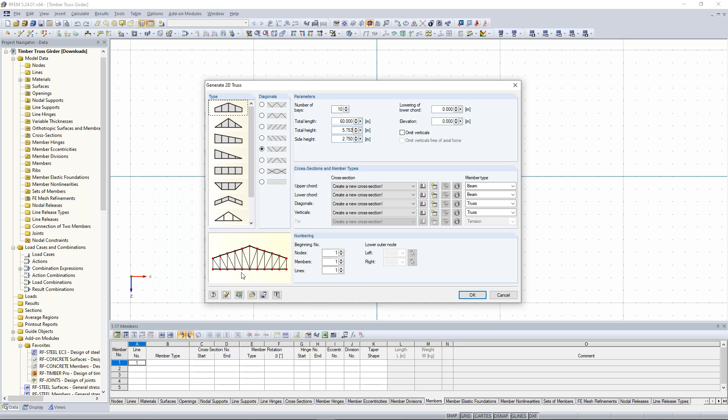At first we want to create this girder, this truss structure. For that we go to the menu bar and click on Tools, then Generate Models by Members, and here we can choose 2D Truss. I decide on this type of diagonals because I want to transfer tension loads, tension forces, in the diagonals, so I choose this type of 2D truss. My number of bays is 10, and the total length of this girder is 60 meters. The total height at the point here in the middle is 5.753 meters, and the side height, on the left or right side, is 2.75 meters.

Now I have to create new cross sections with the right material, for the upper chord, the lower chord, diagonals and verticals. For the upper chord, I don't know the right pronunciation, sorry for that, I choose a new cross section. I think the right word is chord. Yeah, I guess so, it's chord. Okay, thank you.

Thank you, Ayla. So I create a new chord and choose a rectangular chord because we want to create a timber chord. I click on that icon, and my parameters for the width and height are: width 220 millimeters, and height 560 millimeters, so 56 centimeters and 22 centimeters.

Now important is that we choose the right material. Here you see I just have concrete and steel, but we want to have a glue-lam timber. So we have to create a new material, and here we create this new material when we click on this material library. I choose timber, and this mask jumps to the normal timber materials.

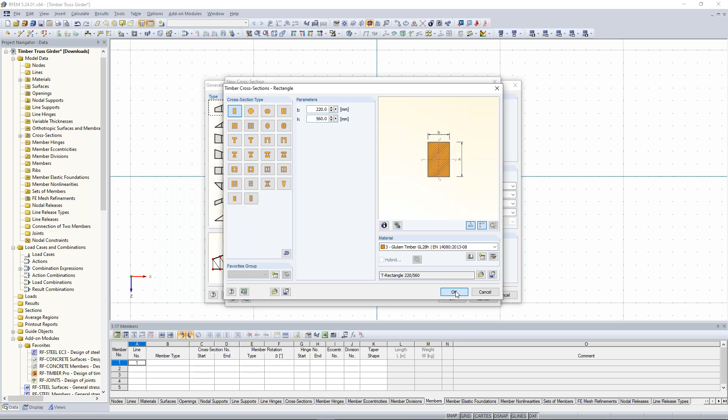Now I can copy this cross-section description with the Control key pressed, plus C key. Click OK, and create a new cross section for the diagonals. Now I copy this, choose the right material, and change the cross section to 200 and 200, so we have a quadratic cross section here. Click OK.

Now the same thing for the verticals. Here we have a cross section of 200 and 180, also material glue-laminated timber.

So now on the right side you see the different member types, beam and truss. Where is the difference? Beam can transfer all typical internal forces like bending moment, normal and shear forces, while truss is a member type that has hinges at the ends, and therefore can transfer only normal and shear forces, no bending moments. Keep that in mind.

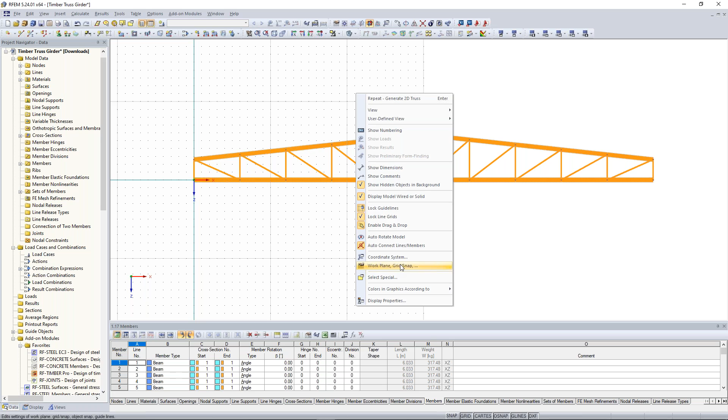The next step is that I want to adapt my grid to the size of our model. For that I right-click and choose work plane grid snap, and here I have the possibility to adapt my grid according to the size of the model. When I click on that, you will see the whole grid system adapt to the whole size of my model, and this makes the overview of the whole model and project a lot easier.

The next step is that we delete the left members and the right members, because I want to create here a support, a single support. So I draw a selection window from the right to the left side, and the same on the right side. Then I can right-click and say delete. Now these members were deleted.

Now a very important point, because I want to transfer some forces here, we change these diagonals to the member type beam. I select this diagonal, press the Control key to add additional members to the selection, press this diagonal, then double-click with the left mouse button, and now I change the member type to beam. Click OK.

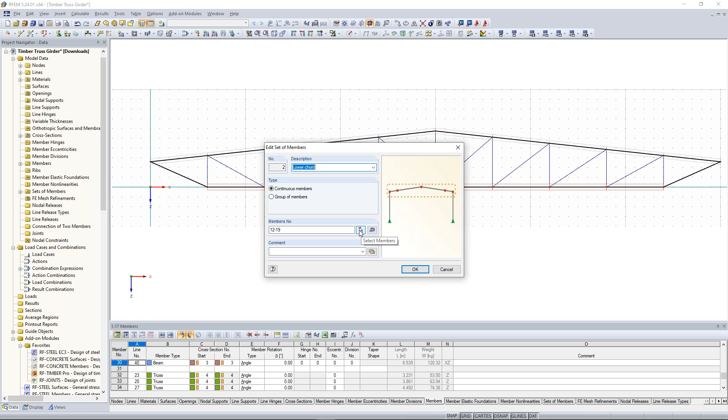I want to add these members to that set of members. I double-click on this set of members and add these additional diagonals to that set. For that I click on this icon, select members, click on those diagonals or members, click OK, and you will see here this set of member.

So you see this program created automatically this set of members by generating this 2D structure. This will help us later when we want to add some loads.

The next point is that we add single supports here. We select through this selection window this node, and after that click on the symbol bar for new nodal support. This support should have the type hinged.

On the right side we have another support, and this should be a support which carries only vertical forces. So I move this with this selection here on UX away, so that we just activate the vertical forces, similar to a sliding support in the X direction.

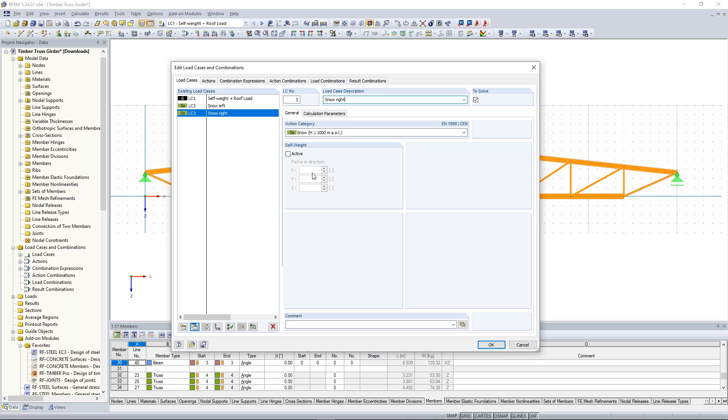The next load case is snow, and I want to consider the snow loads once on the left side and once on the right side. So I enter here left. Then I can easily copy this load case by clicking copy selected load case and create new, and change the name from left to right.

And the last load case is wind suction, because we want to consider also a suction wind load case here on this upper chord.

Important thing here is, because we activated on this basic data at first that we want to create these load combinations automatically, several registers open with additional options. For the snow, it's important that the acting of the snow action is simultaneous, meaning both load cases can combine with each other, so no one excludes the other. We will see that later on the load combination. I click OK.

Now I can create the load cases or loads. I click on new member load. Because we have this set of members, we can refer to them. I click on sets of members, and the load parameter is 2.5 kilonewton per meter, related to the true member length, because we have an inclined member. For self-weight, it's important to select this option, global related to true member length. I click OK. Now watch, I can just click on this set of members, and the whole load will be created on that upper chord. It's a really big advantage of using sets of members.

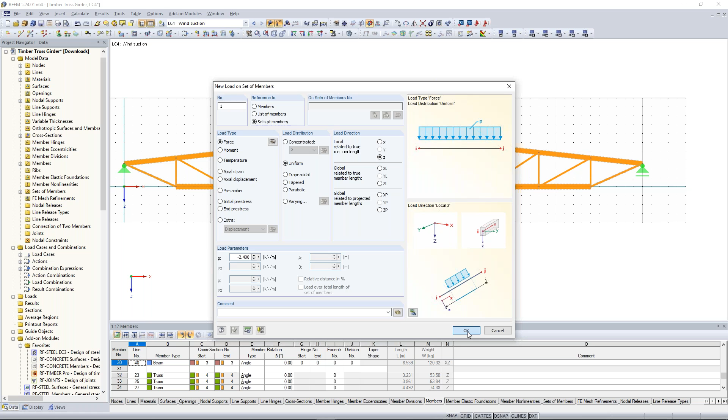Good, next load case, wind suction. I want to create wind loads here, so I click again on member load, referring to sets of members. Now the important point is I want to refer to the local related member length, so the local axis of my members. Because we have suction forces, suction loads, I have to enter a negative load parameter: minus 2.4 kilonewton per meter. I click on the upper chord, and the creation of our loads is done.

When you want to know the local axis of one of these members, no problem. Right click on one of the members, say local axis system of members on, and you will see the local axis coordinate system of the members. I deactivate this again because I know my system.

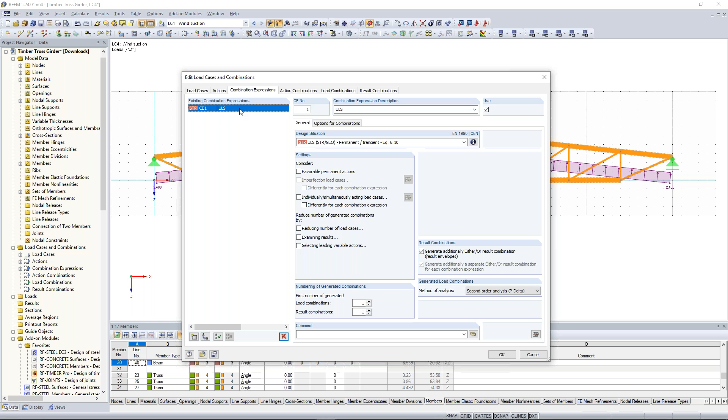Now we can calculate this. Go to the load cases and combinations again, click here, and look for the combination expressions. Here you see the ultimate limit state and also the serviceability state. For this easy and simple design of the truss structure, I don't need the serviceability expressions combinations, so I select them all by holding Shift and delete them. I'm just interested in the ultimate limit state because in this case it's more important.

I jump to the next register, action combinations, and here you can see the different action combinations with the leading load case, shown by this combination value 1.5, and here also the other leading load case. In this case, we have the wind load case as the leading load case.

The load combinations we can see here, I think this is pretty clear. As I said before, we have activated in the register actions both load cases of snow, which means that they can act together.

And this is important to know, because when we activate here the snow action alternatively, this would mean that both snow load cases would exclude each other. I click on OK, and now I can say, okay, calculate all, please. After that, let's watch the results of this girder, of this truss girder. The calculation will take some time.

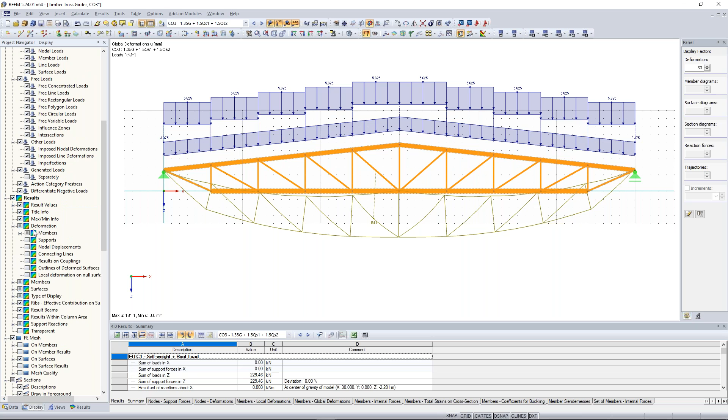I think that's pretty clear, and here we can see the deformation. We can display the deformation a little bit nicer. Just click here on the display navigation bar, go to results, and click on area deformation, members, and cross-section colored.

But I have more interest in the internal forces. And for me, very important, and now you can see it, the bending moments aren't so important at that truss structure. Yeah, you see it here. There are some bending moments, but they are not very high.

But when we look at the normal forces, they are very high. Look at that here, 900 kilonewton. Really, this is really much. And here again, compression forces in this upper chord, 900 kilonewton. This is really much.

And I think there will be a little problem with that small diagonal member, 600 kilonewton as tension force. I think there we will have some problems, but we will see it after the design of those members in the timber design.

Good. So now let's come to the design of this timber structure. For that, I jump to the data navigator, and when you scroll down, you will see here our add-on modules.

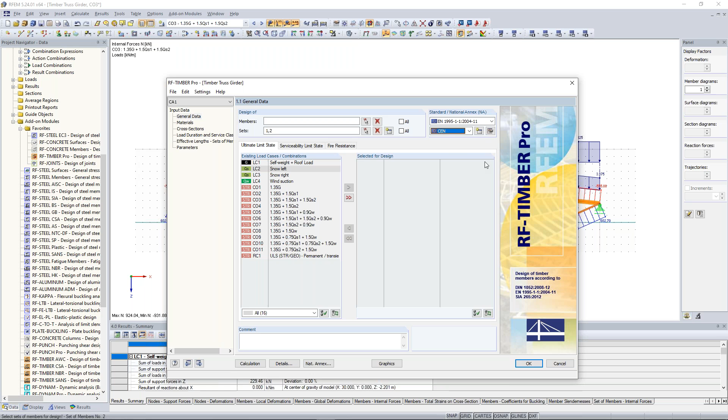In this case, we refer to our Eurocode standard and no German national annex, just the normal Eurocode standard. If you want to see more details concerning some values here, you can see it by clicking on that icon, and here you have some additional information on how they calculate some limits and some designs.

Now important, I have to select the right combinations or result combinations for my design. I decide here to design my load combinations. I choose here every load combination and transfer it to the right side, select it for design. I just design here for the ultimate limit state. We don't need any serviceability limit state.

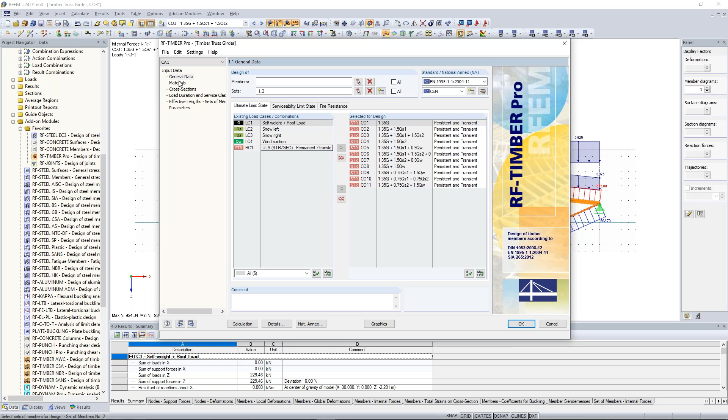Good. Now jump to the next window, and here we see the material timber for the design. Here we can see some material properties, characteristic strength for bending, for example, or for tension, compression, and so on. Let's jump to the cross sections. Here we can see some cross sections which will be used for the design.

And here, additional note number 7, no member with this cross section is selected for design, because we just design here the upper and the lower chord, and the verticals aren't selected for that design, because we can create here afterward several cases for our design, but we do that later.

Now, important point, load duration and service class, especially for the timber design. And here we can see it. Self-weight and roof load is permanent, and our snow load cases are short-term, so the load duration class is important for the timber design. And here we also have this service class. I decide here for the service class the second, and so we have here some additional information for service class 2.

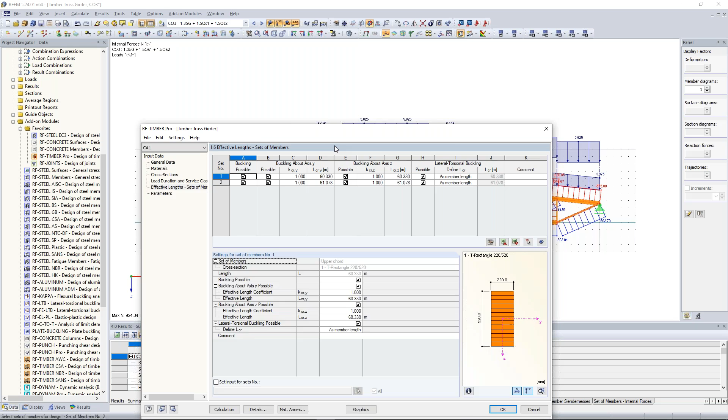And now I assume that my upper chord is fixed enough due to additional members out of the plane. So I assume that this is fixed enough, and I say that no buckling is possible for the upper chord.

And for the lower chord, we have just tension forces, so no stability design is necessary, because we only need to consider stability if we have compression forces. The only compression forces you will see here are in this upper chord. So for tension forces, we don't need to consider buckling or torsional buckling. I don't select anything here.

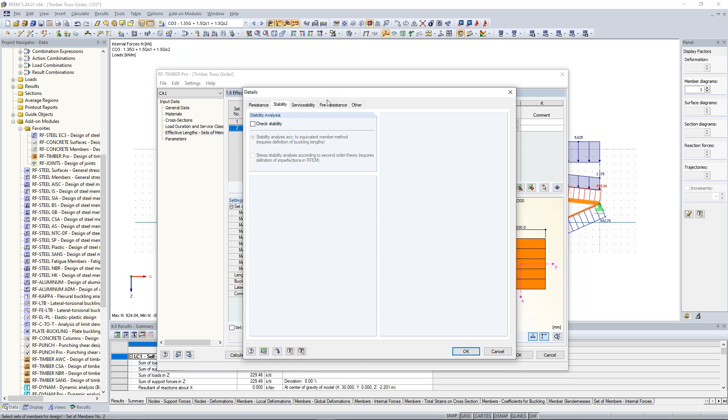I can do the same thing when I click here on details. When I jump to the stability register, I can say please don't consider any stability, because I know my upper and lower chord are fixed enough, so stability wouldn't be important here. Same solution.

Parameters - I can add additional parameters here, but in this case this isn't so important. So how can I calculate this?

Now you can see here two different windows. First of all, here at the results, these results are listed in different categories: design by load case, cross-section, set of members, and so on. I choose here by cross-section.

And almost everything is fine, except here this rectangle 200 by 200. I'm pretty sure that this is this diagonal here on the left or right side, so I can filter them a little bit better.

I click here on this rectangle and I can see this diagonal member is not good, because our cross-section resistance, our design, is over 1. And when I click here on this rectangle, I can see the design ratio, and that this design ratio is more than 1.

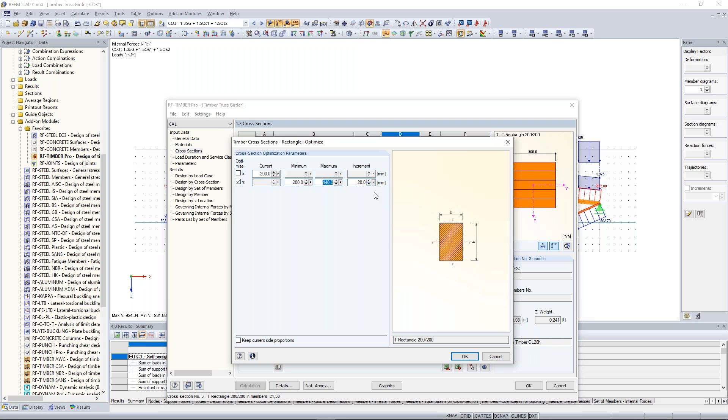And now you can say what you want to optimize. I want to optimize the height of this cross section, so I click here on height. The width should be the same, just the height. And I know the height can start at a minimum of 200 and a maximum of 440, with an increment of 20 millimeters.

I click on OK, then I click again on the calculation, and now you see the designs are good enough. At that moment the design ratio of the new cross section is, here we can see, 200 over 220.

Good. Now it's important that you also transfer this new cross section to RFEM. Export cross section to RFEM. Click yes, because now it's important to calculate the whole structure in RFEM again, since we have new stiffness in that case. So calculate everything again.

Okay, now let's go to the results of our add-on module, RF Timber Pro. And here we can see the max design ratio is 0.99. This is very good.

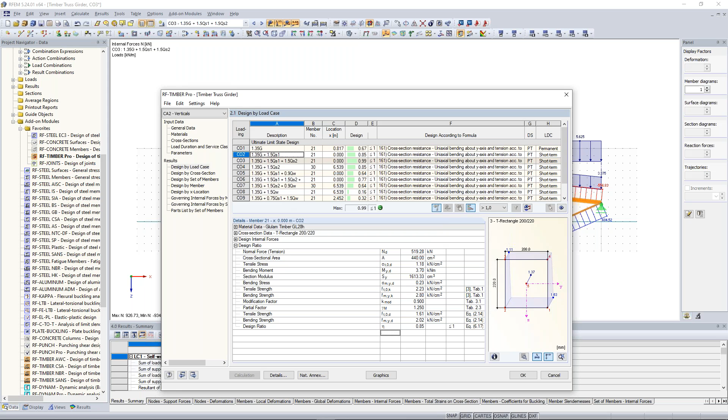I select the members for the design, and now I can click every vertical manually, or I use a smoother way of selection. Here in the symbol bar, I have the option to select special objects here in RFEM. I click on that.

And now I choose here, I activate this member. Scroll down and say, okay, parallel to member. Now I choose this one member, click OK, and you will see all members are selected parallel to that first member. I click OK, and these selected members were transferred here to that part. So again, I choose my load cases for the design.

I go to materials, I think this is pretty clear now, cross sections and so on, effective lengths. Oh sorry, here I have to select the service class to 2. And now important, here we can get some pressure forces.

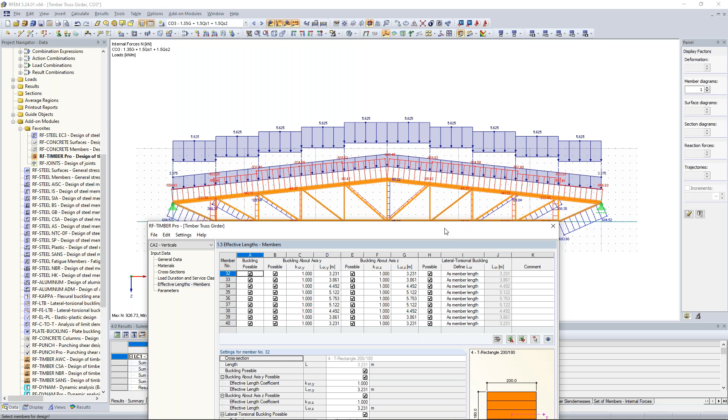So the inputs of this length are enough, and I can say okay, calculate. And again I see, okay, all designs are fulfilled. Good.

Now the last case is the design of the diagonals. So new case, diagonals. Click on OK.

And again I choose here the right members for the design, and I want to design here this member, the diagonals. Now it's a little bit hard to select them because clicking at the same time is a little bit hard, so I use here my view navigator, and I want to display them by different cross-section types. So members by cross-section.

And now I decide here for the T rectangle, 200 by 220, and I choose here these members. Click on OK. The members on the left and on the right side I don't want to consider because I have already considered them in the design of the lower and upper chord. So in the first case of this design, click on OK.

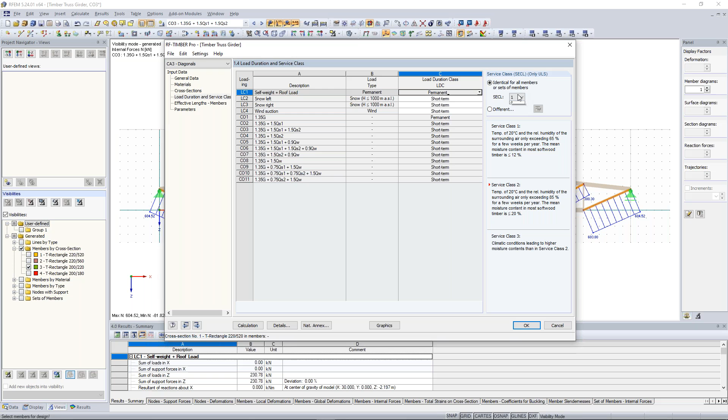Choose here the right load cases for the design. Jump to the next window, materials. I think here is pretty everything clear. Cross section, also here is everything correct. Load duration class, yeah, the same things here again. Maybe the service class, change here to 2.

Effective lengths. Again I suppose here the member length as the buckling length, because I say okay, out of plane and in plane should be the same as the member length, because I suppose here this Euler case 2, and I say calculation, and all proofs are fulfilled, are correct under the design ratio of 1.

And yeah, this was the very easy design of this timber truss structure.

We can also watch the different design ratios graphically. So I click here to RF timber, and here we can see the different design ratios.

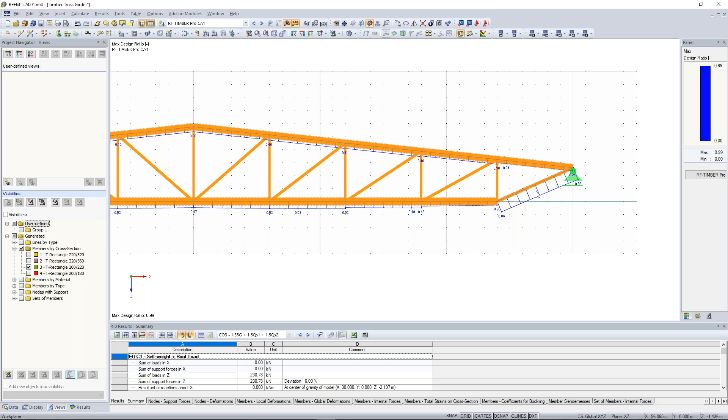And yeah, as we supposed correctly, this diagonal here on the left and here on the right side has a very high design ratio in comparison to this normal lower chord. But I think that's pretty clear because here we have a smaller cross section, like here on this upper chord. Jump to the next design case, so the verticals, and here the diagonals. Yeah, this was the design of this timber truss structure.

Good, Ayla, any questions or anything to show? What would be good? No, I think everything is fine and nothing special.

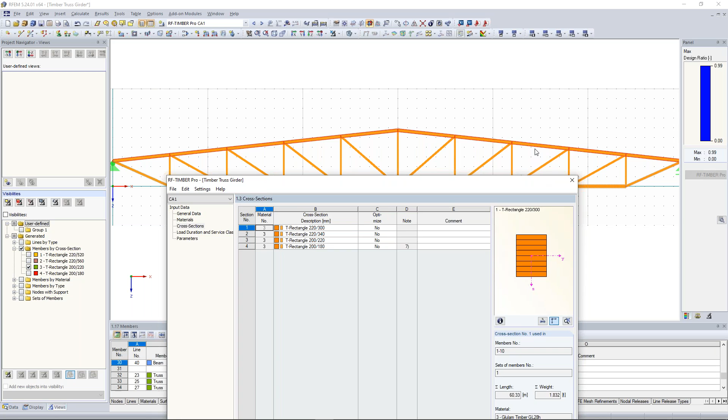This is something you have to consider when you do this design, because when I say here okay, export all cross sections to RFEM, and I say yes, you will get higher deformations because now our structure is thinner, I would say. You have smaller cross sections, so it's not as stiff as before, and you will pretty sure get higher deformation.

Let's look at the deformation, maybe on that load case. What's that? Maybe this would be more interesting when you have just vertical loads.

And I remember that we have a deformation of 180 millimeters. And now we will get deformations of 260 millimeters, so 8 centimeters more. I don't know, this is also something you have to consider in your design.

Good. Anything else, Ayla? Not yet, no.

Okay, we have one new question. Is it possible to have multiple sections for each member? Yeah, that's possible, but you have to create more cross sections for different members and put them to the design.

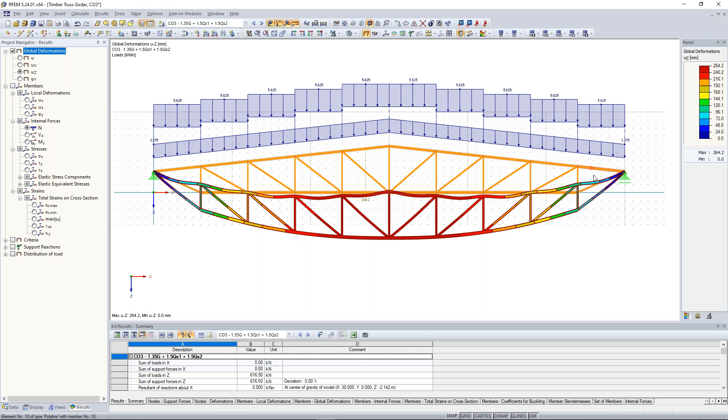So I can, but we almost did the same thing here. We designed a different cross section for the upper chord, a different cross section for the lower chord, for the verticals. Maybe you can optimize your construction for the verticals and the diagonals, because here you will get more tension forces. So you can say the first 2 rows of this diagonal can be a different cross section and put them into the design.

But also consider the production in the factories of this structure. When you say please make every cross section different, the factory producing this structure will say wouldn't it be more economical if we have similar cross sections? Yes, this is possible, but also consider the production and manufacturing of this truss structure.

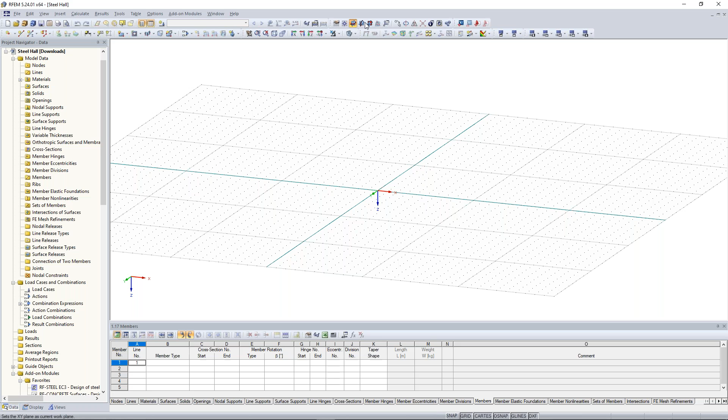Again, here we have the model type 3D. In the symbol bar you can see 3 different work planes. Now I click on the work plane XZ because first I want to create a 2D truss structure. Again, as before, click on the menu bar, tools, go to generate models, members, and click on 2D truss.

Now we have to create new cross sections, but I think that's known by now how this works. So I create new cross sections. The upper chord has a cross section of HEA 300. Click here, import rolled cross sections, HEA 300. And you see here the cross section description.

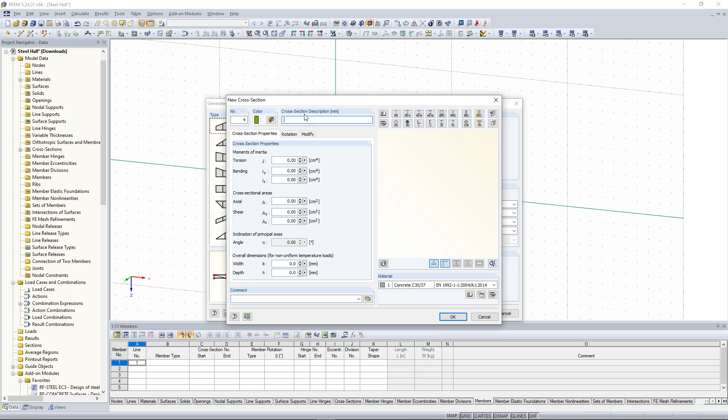Again, I choose the correct material. And the verticals are HEA 160. Good, I click on OK.

The next part is that I change these outer diagonals because I'm pretty sure they will get more internal forces, especially normal forces. Therefore, I change the cross section. I select them, double click on one of them, and change the cross section. I change it to HEA 140, choose the right material, and click OK.

Good, so now we have different types of cross sections. We can display them a little bit nicer. I can show you how it works. When you go to the display navigator and scroll down, you have the possibility to color the graphics according to the cross section. And here we can see the different cross sections by different colors. And if you want to change maybe one color, no problem.

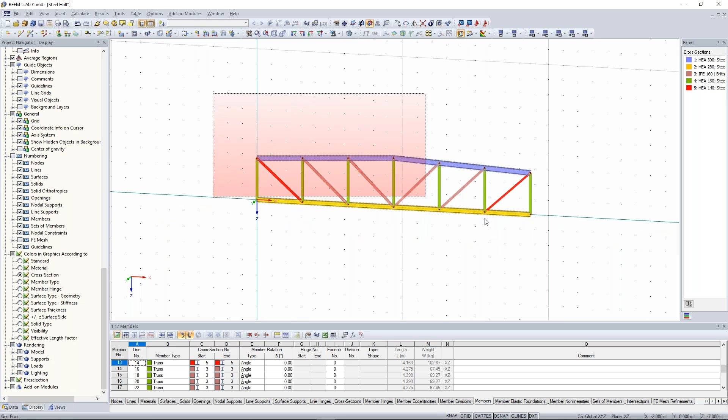Good, so the next step is moving this truss 8 meters along the z-axis upwards. Select everything, right click, click on move or copy. I just want to move it 8 meters high, so I don't have to enter the number of copies. Displacement vector - remember our global z-axis is downwards, so when I want to move it upwards I have to enter a negative value, -8.

So the next part is that I delete here this outer vertical because I want to connect a concrete column. So I delete here this outer member.

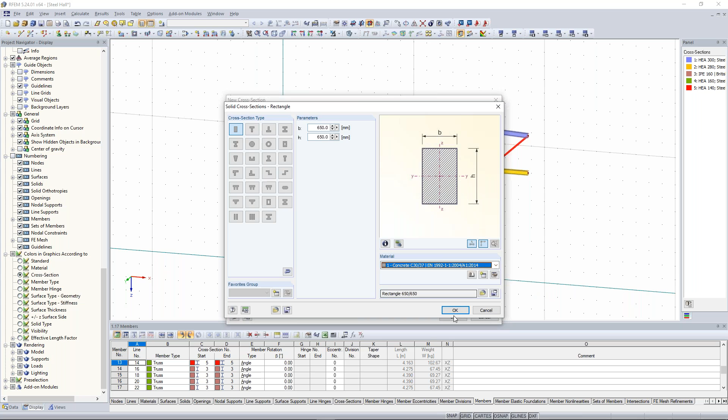Now I create a new column. For that, I click on the symbol bar, new single member. I create a new cross section, rectangle and quadratical cross section, concrete C30/37 according to the Eurocode. I click OK, again OK.

I start from the bottom to this corner node of this truss structure. Now you can see I can't snap these grid points because I didn't activate this. Here on the status bar, you can activate snap to grid. Now it's activated and I can snap these grid points. Good.

Now I copy it easily by drag and drop, pressing the Control key on my keyboard. And because they have the same colors in this case, I change the color of my concrete structure to pink. Nice, good.

The next part is that I adjust some hinges. We offer two ways of inserting hinges. The first, maybe not so known, is that we can add hinges graphically. Therefore, go to the menu bar, insert, model data, then go to member hinge, and then assign to members graphically.

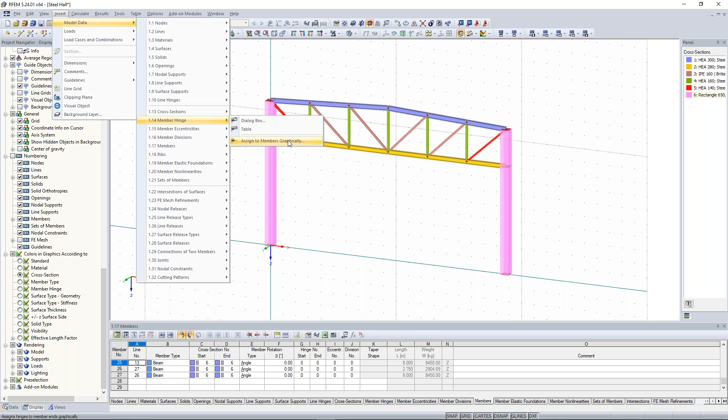As you can see, I want to connect this upper chord by a moment hinge here on that concrete column. Therefore, I create a new hinge type and activate the moment hinges. I can also do it by clicking on one of these icons, set rotational release MY and MZ. It's the same solution.

I click OK, and now you will see blue nodes or circles. When I click in the middle of one of these members, the hinge will be created on both ends. And when I just click on one member end, it will create this member hinge just at the end of this member. I do it here on the left side and once on the right side. Click OK.

I change here the display model to the wireframe model, and you will see the hinges a little bit better. And we do the same thing for the lower chord.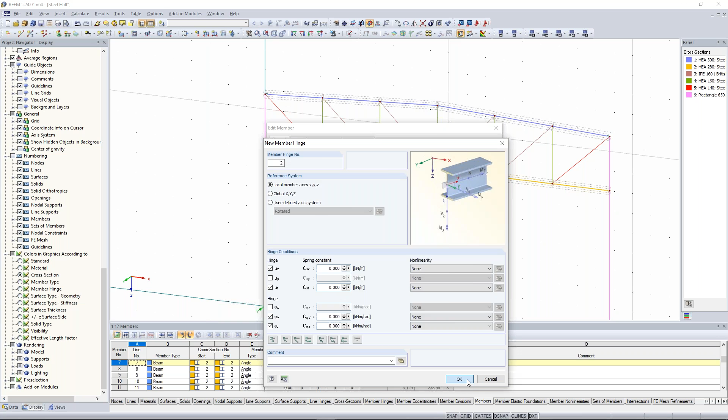After the calculation, we can see that the tension forces in that lower chord are transferred to that diagonal into that column. Because when we have tension forces here, this tension force will go along this diagonal and will transfer this tension force as a compression force to this concrete column. I think that's pretty clear.

Then the right member, and here the same hinge, but at the end. Good. Yeah.

The next part is that we check the self-weight of the structure and watch the internal forces, to see if this frame is modeled correctly. So for that, I choose here also the lower nodes because we want to create now some supports.

We have a rigid support here. This enables me the activation of all moments and vertical and horizontal forces, reaction forces.

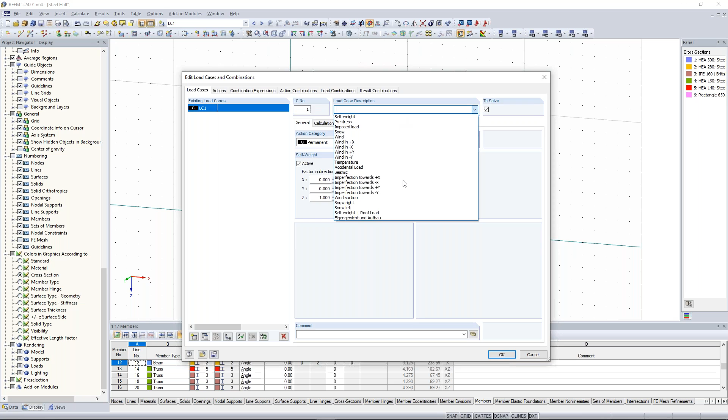Now I create a new load case: self-weight, and I activate the self-weight, click OK. And now I want to see the results.

Okay, I think the deformation, here we see at first the deformation, but for me more important, the internal forces, if we modeled and entered the hinges correctly. For that, I activate here the internal forces. And yeah, here we can see it.

Tension forces, because we have positive normal forces. Compression forces, yeah, simple truss structure. I think that's pretty clear. And here we can also see that this tension force is transported to that diagonal into that concrete column.

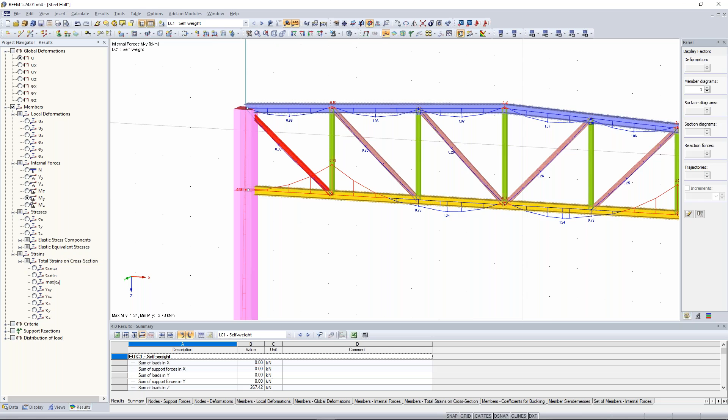And now let's watch the shear forces. And here we can see at this hinge we have no additional tension forces, no normal forces. The same with the shear forces, you can see 0. And bending moments, again here the same, 0 bending moment. On the right side the same. Good, so I think we modeled it correctly. So let's continue with the other frames.

Again, I want to adapt my work plane according to the size of my model. Now I want to copy it 2 times in the global Y direction. So I select everything, right click, move and copy. Number of copies is set to 2 and my displacement vector is in the global Y direction, 9.5 meters.

Good. I change here to the work plane XY. And now I want to add here additional beams.

Let's do that, new single member. And they get a new cross section, HEA 240. Material steel.

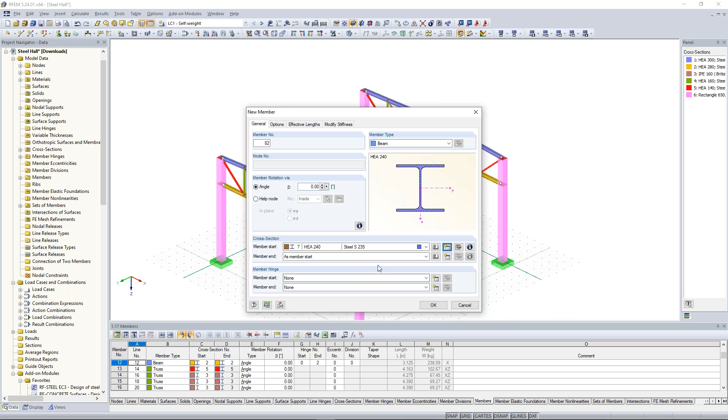And now I want to add here some hinges on both ends, so they will be connected as hinged beam, as truss we can say, because we have on both ends hinges, moment hinges. Okay, so let's do that.

So, good. And the other nodes, they will get also new beams.

For that, we create a new hinge. The member start should have here also at the start a new moment hinge, and at the end we can leave it as none, because here we do another member hinge. So, very easy.

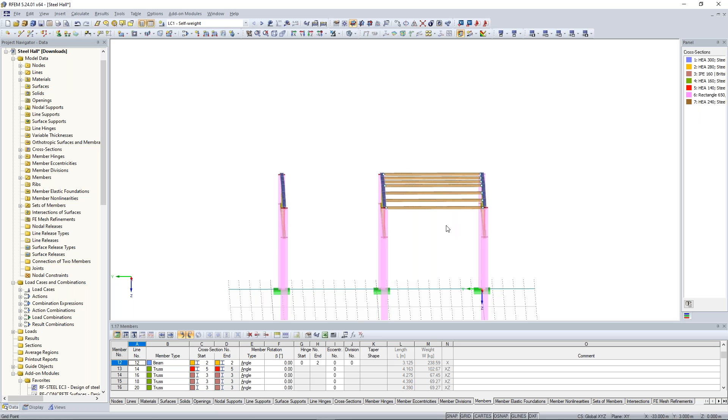So now I want to copy that beams. I press my control key on my keyboard, select everything, and by drag and drop I can easily copy it.

Good, now I want to create here at that beams scissor hinges. What are scissor hinges? Scissor hinges: when you have four members connected, like here for example. Here, 1, 2, 3, 4 members connected in one node.

I can consider scissor hinges, and each of the two member pairs transfer moments in its continuous member direction, but they do not transfer any moments to the other pair. So only shear forces I want to transfer to that beam. So when this continuous beam gets some loads, it will have a distribution of a moment, something like that, so a support moment and a field moment, and I want to transfer only shear forces to that beam, to that upper chord.

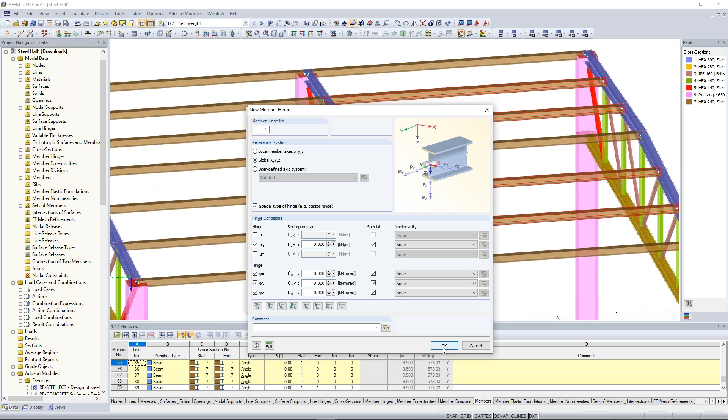And I want to consider the transfer of moments in my continuous direction, so I have to activate here the bending moments, and also I don't want to transfer any normal forces. So now, important thing, I have to activate here the UY direction, because I refer to my global system. I have to activate here the scissor hinge, and also one torsional hinge, because I don't want to have any torsional moments in my beams. I click on OK, and you will see here this S for scissor hinge, and we will do the same also for the other side.

But here, member start, I choose here the global. So here we have this member scissor hinges, and for the end of this beams, we create also a new type of cross sections of member hinges.

Right click, member, edit, and here we create for the end these kind of hinges in order not to get any additional forces or moments. Good.

Okay, so let's calculate this thing maybe in order to see if we modeled everything correctly. Maybe one note, I forgot here some bracings. We can create also here some bracings.

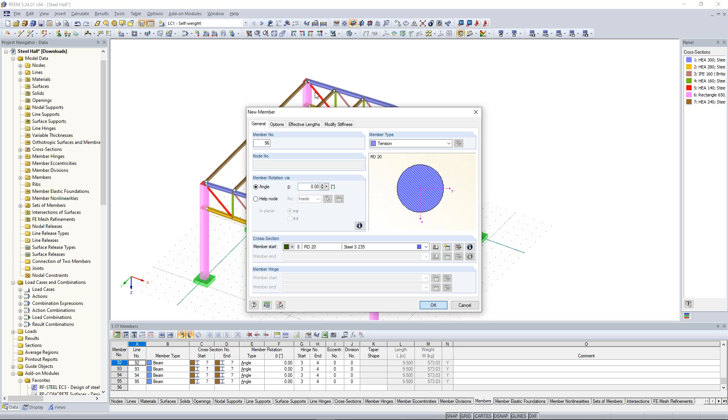So just click here on new single member. Change the member type to tension. I choose here a round cross section of the diameter of 20 millimeters. Click on OK. And create here this truss beams. So, good.

So now let's calculate this thing. So it takes some time. And let's look to the internal forces. Maybe according to the internal forces, I can explain the scissor hinges again.

So I choose here these 4 members and I want to explain you the scissor hinge again. So as you can see here we have our continuous beam, and here we have also a beam. And what I have done with the scissor hinge, I said okay, please create me a scissor hinge that I transfer only my shear forces, so my vertical forces, to that beam in this direction, to the blue beam. And everything else, this should be considered in that continuous beam.

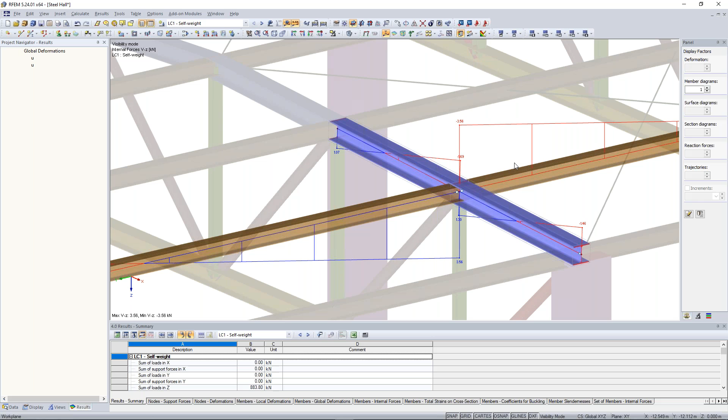And you can see no moment was transferred to the other beam. When we look to the shear forces, maybe here we can see, okay, here we have additional shear forces from that continuous beam. And this is something important to know for the scissor hinges. Okay, good.

Now I want to show you one additional piece of information. When we look at that beam, we see here the distribution of the bending moment. Maybe you think this isn't correct because this distribution would mean we have a single force in the middle of the beam. Normally we just have the self weight, so it should be a quadratic distribution of that moment.

When we change here on the calculation parameters the number of divisions of members for the result diagrams, maybe to 30, we will get the right distribution. Let's calculate this again.

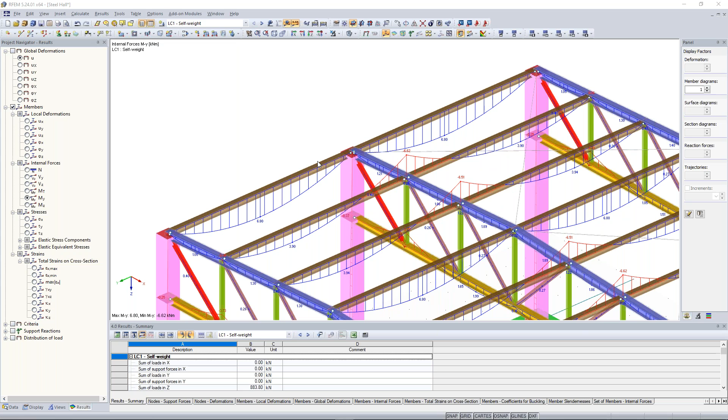Oh, now I'm calculating every load case. I didn't mean to, but it doesn't matter. Now you see the right distribution of the moment. So when you think the distribution of one of your systems isn't correct because it has the wrong distribution, check here on the calculation parameters for the right divisions of members for the result diagram.

Okay, good. Now let's come to the load cases and loads. Before that, I forgot to mention that in the calculation parameters you have the possibility to check the deformation of failing members, especially when you have nonlinear member types. We have nonlinear member types because we have tension member types for the bracings. You can handle them when they fail, so that they are removed individually during the successive iterations.

This is maybe one important point when you have systems or models which have some instabilities. Then you can check that additional option and activate it, and maybe your model will calculate then.

Good. Now let's come to the load cases. I click here on new load case. I create a new load case, imposed load for category A, then a new load case, snow, and the last load case, wind in the positive X direction.

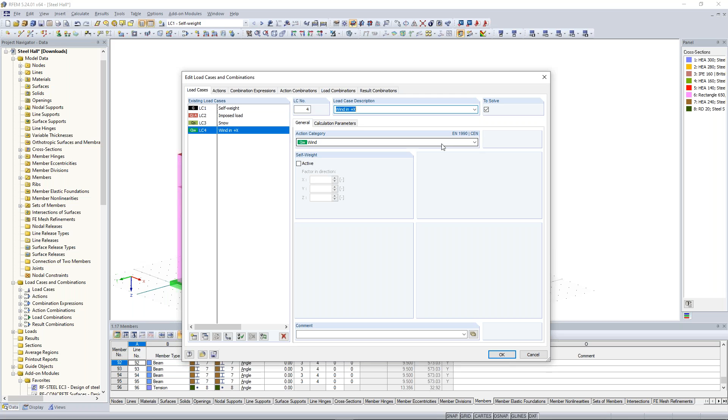Let's take a look at the actions: imposed, snow, and the other things, combination expressions. I just want to consider the ultimate limit state here, so I remove the serviceability action combinations and load combinations. This will be done automatically because we had set them before in the basic data of our model. Click on OK.

Now we add the loads on our structure. I choose the right load case, and I want to add some loads on that roof plane. For that, I go to Tools, Generate Loads from Area Loads on Members via Plane. First of all, I relate to my true area because I have the self weight. The magnitude is 0.5 kilonewton per square meter, and now I choose the corner nodes so that I can get the boundary of my area load plane. Click on OK.

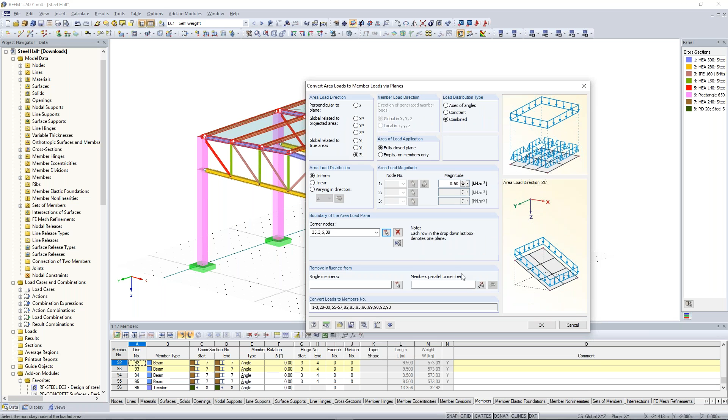Now I can remove the influence of members. As you can see on the work plane, at that moment everything is selected, also the upper chord, but I just want to consider the loads on the beams here, on the continuous beams, not on the upper chord. So I say remove the influence from members parallel to the upper chord, and you will see now just these members are selected. Click on OK, and let's do the same thing for the right side.

Again, click on Tools, Generate Loads. Here we can see the program uses the corner nodes from the last time. So if you create the new plane again, it has the same corner nodes, so you have to delete these nodes. I click here, delete current area plane, then select the new corners. Click on OK. Now we say again parallel to this upper chord, and click on OK.

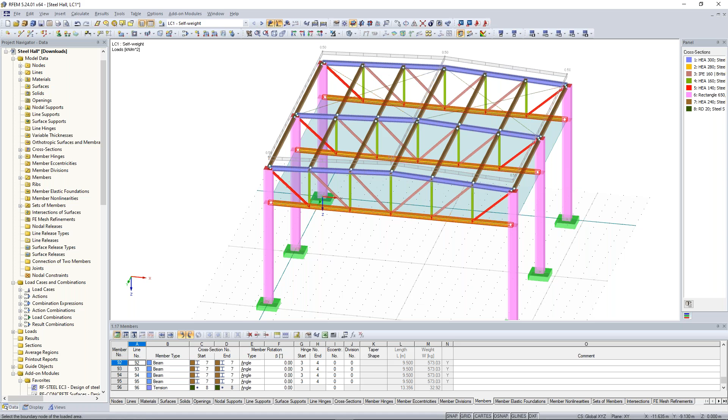Now let's do this also for that plane: generate loads from area via plane. Here we have the same magnitude. I choose the right nodes and click on OK. As we can see, here we have some information box about the generation of the loads. Click on OK, and when we right-click on display separately, we can see how the loads were added on our members.

Now jump to the next load case, imposed loads. Click on generate loads again. It's a big advantage that RFEM remembered our last input of corner nodes, so I can say please add here the same magnitude. Click OK. And we have the same input for our load case imposed loads.

Next load case, the snow load. Here I choose also my tools, generate loads, not area loads on members via plane, but we have the possibility of snow loads on duopitch roof.

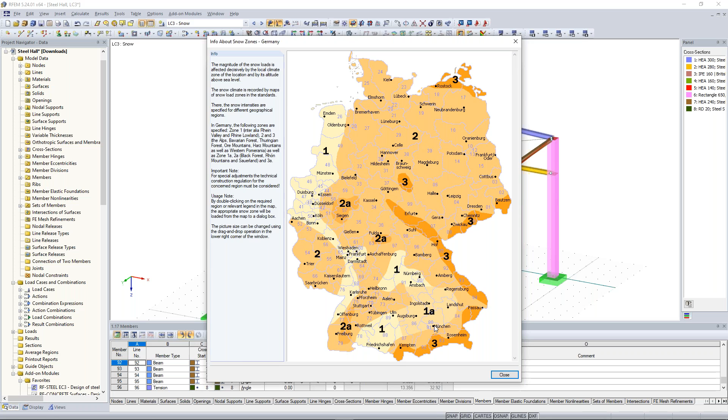Here I choose the zone number, so first I have to choose the right national annex. I decide for Germany because we are located in Germany. I choose the right information zone, in this case Munich. I double click. The altitude is set to 550 meters.

Now it's important to choose the roof geometry correctly, so in the right order you see A, B, C, D and so on. Clicking in the right order, C, D, E, F. Here we can see the new load case which will be generated.

I want to remove some influence because, as you can see, I just want to have my snow loads on these beams here, members parallel to that upper chord. Click on OK.

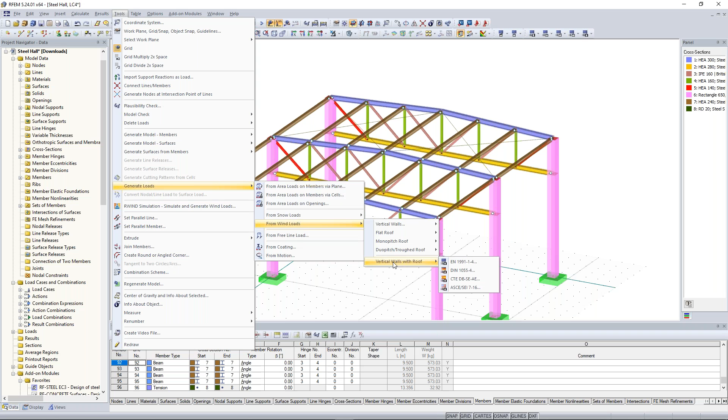Now let's do the same thing for the wind loads. Jump to the next load case, wind in positive X direction. Click on Tools, Generate Loads, Wind Loads. Here we have the possibility to generate wind loads on vertical walls with roof. I decide for according to the Eurocode, and again here for the national annex we have the possibility to consider other national annexes.

Wind zone, here I choose Munich, category 2, because I have maybe a little bit higher buildings in the city, in a bigger city. Again, here I choose the right base geometry. Now it's important that you do the base geometry in the right order as the roof type and geometry.

Start here again on the left lower corner, and when you want to select the roof type you have to start at the same left upper corner, as you can see in the right bitmap. So let's do this.

And here the same. And because we have a very flat roof, the program will say that it will consider it as a flat roof for the wind pressures. So now we have the wind load case, wind in the positive X direction.

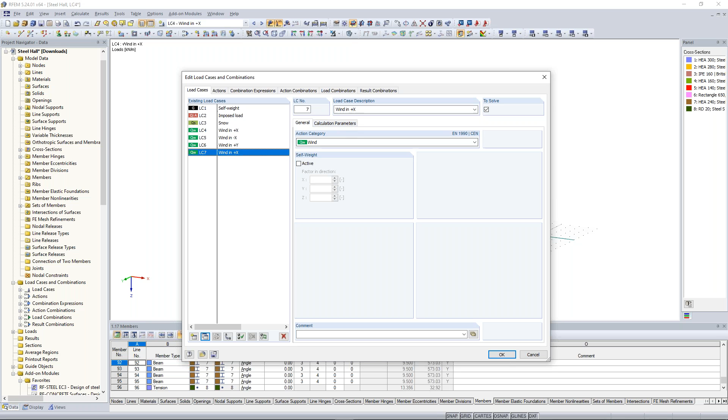Because now we want to consider the wind loads in every direction: wind in -X, wind in positive Y direction, and in negative Y. Click on OK.

The only thing we have to modify is the direction of our generation wind tool. So double click on the generated wind loads and choose the right side. In this case, it's from a negative X direction, so DE. And you will see how it turns to the right direction.

And we do the same thing for the other locations for the Y direction. So positive Y, we need the side AFE or EFA. And let's do the same thing for the other side, the minus Y direction.

So BCD. Okay. Good. So let's calculate everything.

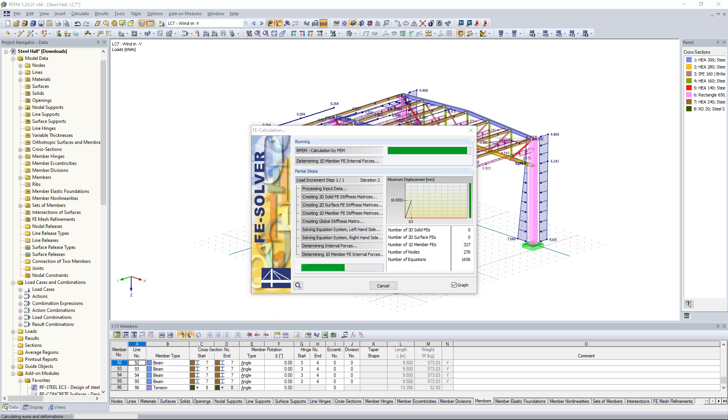Good. Okay, now we have a problem because in some cases our model is unstable.

I think this can be because of these hinges here. I have to correct them, because I think I have the wrong hinges here. Let's correct them.

Okay, let's calculate that again. This will take some time.

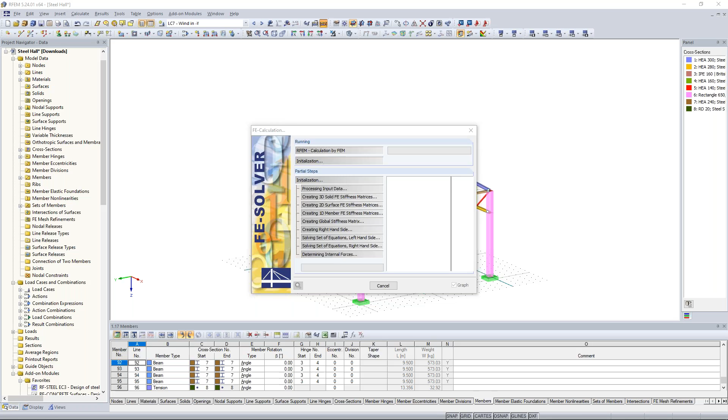And now it was calculated correctly. The reason was because I had the wrong member hinges here. Sorry for that, but now I think everything is correct.

Good. Now let's come to the explanation of the results. I would recommend you do some plausibility checks. Look at the internal forces, look at the deformations. Can this be right? And so on.

So load case 1, self-weight. Can this be correct? Okay, member hinges, I think that's pretty clear. Here we have places where we have member hinges. The bending moment should be 0. Here we have these scissor hinges.

So with this, support moments, field moments. Also our supports, they can act on some moments. I think that's pretty clear.

Let's watch the deformation in UZ. Can this be correct? I think, yeah. Good, and so on. So when you do some plausibility checks, look at the deformations, look at the internal forces, and so on, also the support reactions.

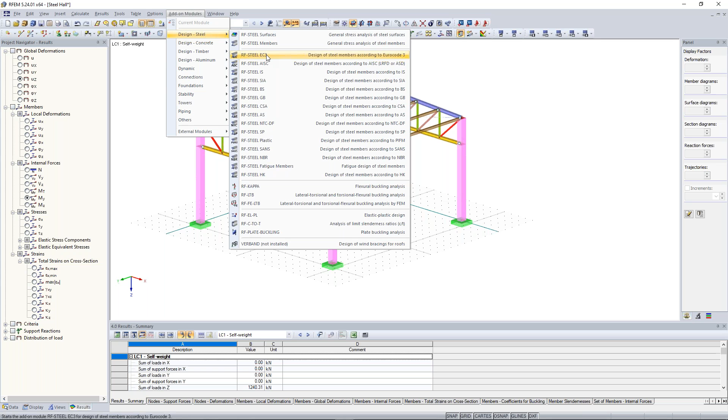And so on. So let's do the steel design. For the steel design, we can use our add-on module RF Steel Eurocode 3. Let's open our add-on modules, design steel, and here we find RF Steel EC3, so Eurocode. Here we can design steel members according to Eurocode 3. Let's click on that.

And similar to our other add-on module RF Timber Pro, we can design different members and sets of members. First of all, I want to design all steel cross-sections, but just a design of cross-sections, no stability design. So I choose here all members, all steel members.

So I go to the view navigator, click here on members by material, and activate just the steel material. Now I draw a selection window, click on OK, and I refer to the normal Eurocode.

When you want to see some more information about some values, you can click here on this button, and you will get some more information about different types of proofs, like the general method when you want to make a stability design, or serviceability when you want to prove the deflections, and so on. The partial factors. Good.

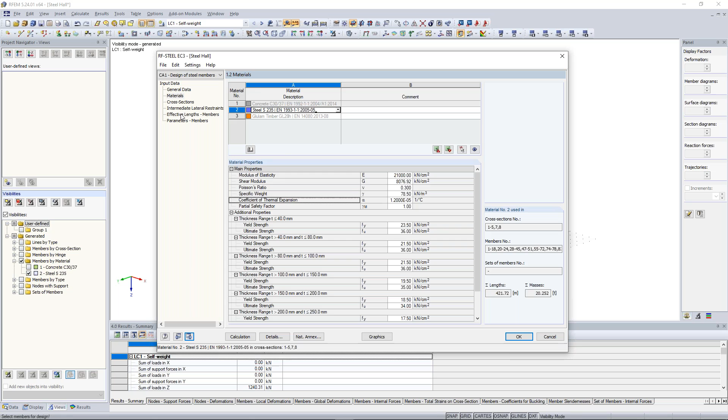Now I jump to the next material. Here we can see different material properties, cross sections, and so on. And also here some intermediate lateral restraints.

So when you have some additional members who fix maybe some beams, you can add some lateral restraints here. And also here, important for the stability design, effective lengths, you can set the correct buckling lengths, and also the right lateral torsional buckling lengths for that.

Proof. But as I said before, for that case, we want to do only a cross-section design, not stability. We can rename this case to just design of cross sections.

And let's go to the details and deactivate the stability analysis. Click on OK, and now watch these two windows on the left side. They will disappear because now we are just focusing on the cross-section design.

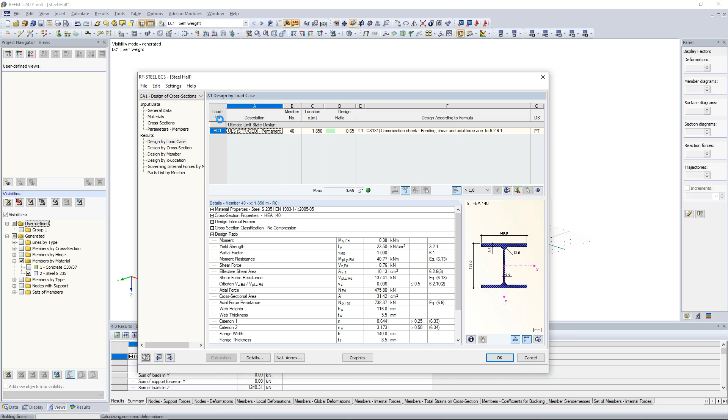Now I have a small problem, sorry for that. Now I want to go back to my add-on module RF Steel. And now I want to do a stability analysis of my upper chord of my truss girder structure here.

So I create a new case: stability analysis of upper chord.

I choose here this set of member because through the generation of our 2D truss, the upper chord was set automatically to a set of member. I click on OK. Now, sorry, I have to choose the right result combination.

When I jump to this window, nodal supports for the set of member, we can see our set of member. If we want to perform a stability analysis, we have to define the right supports at that node. To see it better, click on show figure or rendering, then on local coordinate system, and here we can see these supports. These are the supports for the stability analysis, especially for the buckling analysis and the lateral torsional analysis. Let's calculate this and see if this works.

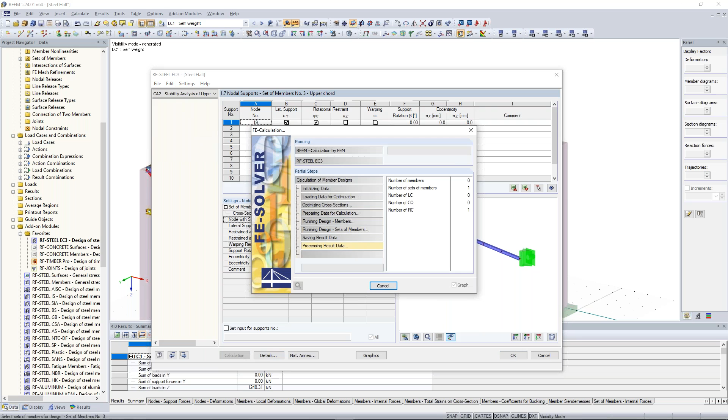Now we can see this is not possible, non-designable, because when you look at the design, this design is not good enough. We forgot to add an additional support at the middle of our upper chord. So we have to add an additional support for our proof of stability.

Now I have to wait for my program again because it is loading. I want to add here in the middle of this upper chord of this set of member an additional support. For that, I click on that node, choose it from the model, and say okay, let's do an additional support, but I don't want to activate any rotational restraint, just a horizontal support, so a lateral support. I calculate it again.

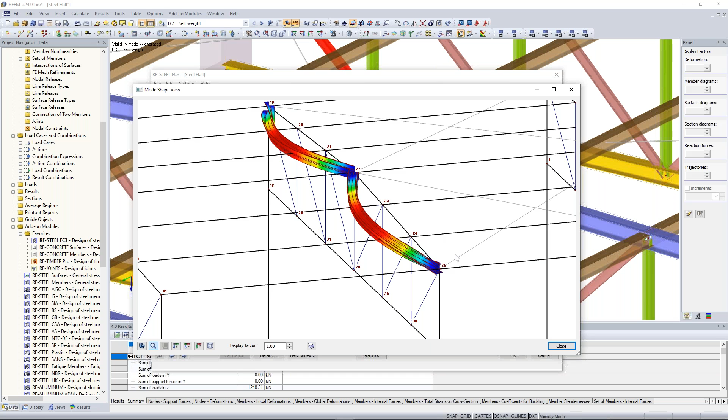Here we activated the supports, as you can see. Here just the lateral support, so just horizontal support, and here also the fixed support. This is very interesting to see how this will deform.

Okay, this was the design, the very easy design of this steel hall. So what we have done is a cross-section design and then a stability analysis of our upper chord.

Ayla, any questions or anything to mention from your side? No, I don't think so right now. But again, if you have any questions, you can write in the chat.

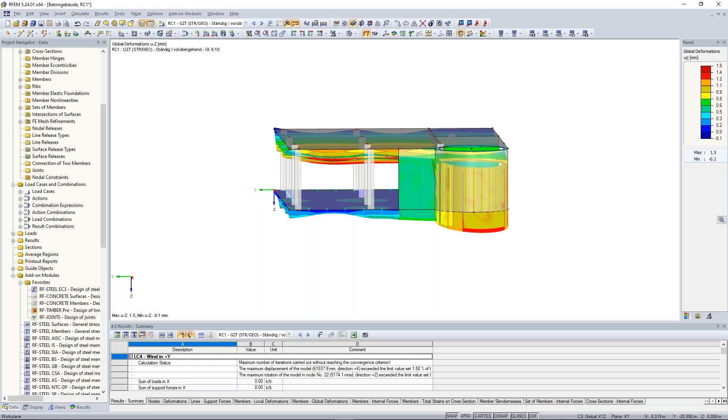Maybe you can remember this was the model we modeled together in the second part of our online training for students. Now we do the design of these concrete surfaces, of these columns, and also of this downstand beam here. So let's do this for our slabs.

For that, we can use our add-on module RF Concrete Surfaces, so the design of concrete surfaces. You will find these add-on modules also here on the menu bar, design concrete, RF Concrete Surfaces. Let's click on that.

So what we can see here in this window, we select first of all the result combination, and then the right standard. We want to design here for the ultimate limit state according to the Eurocode, so no German national annex. For more information, you can edit parameters here, but I think the presettings are pretty good for this first proof of concrete surfaces.

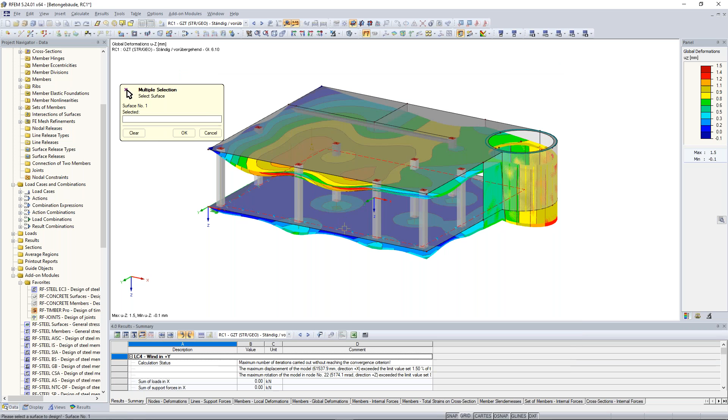And now let's jump to the reinforcement. This reinforcement window contains 5 tabs that control the reinforcement parameters. We define 2 reinforcement groups. So the first reinforcement group will be slabs. Therefore, we choose the right surfaces, we choose the bottom plate and also the upper slab.

And the next part is here, reinforcement ratios. I think the presets are pretty good, so you don't have to modify something there.

Reinforcement layout. Here you can adjust some additional things, for example the concrete cover for reinforcement, which you can do according to a standard. When you click here on edit, you see this exposure class according to the standard, where you can get more information. But because we do here a very easy design, I don't need to consider this, so I let the values stay as they are. I think that's pretty clear.

Here the reinforcement directions: once in the horizontal direction, then the other in the vertical direction. I think that's pretty clear. When you have different geometries of slabs, you can adjust the directions.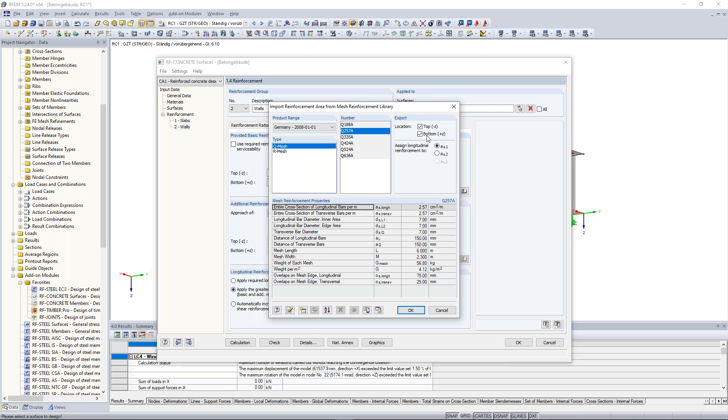And for that case, I choose one of our meshes - I choose here the Q257A, for both locations.

Now I can jump to the last two registers. You can set some minimum reinforcement due to the Eurocode or due to your standard, also the design method, and so on. There are a lot of options you can consider for your design, for your proof of these concrete structures.

More you can find here in the handbook. When you press F1, or here on the left corner side help, it will open this handbook, and you can find a lot of additional information about this add-on module, also something about the theory. When I go here you'll find also a lot of theoretical background and so on. This is maybe interesting when you want to inform yourself, but for this easy example, not mandatory.

Good, then let's calculate this. This will take some time.

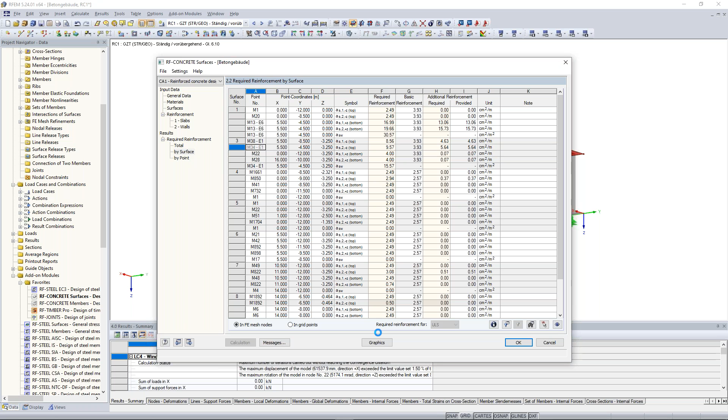So what we can see here now: first of all, the required reinforcement, so what we have to put in our slabs, in our concrete slabs by surface. You get here an overview, but I would recommend using the graphics in order to see it better.

So what we can see here now, let's jump to the results, click here on show reinforcement direction, and here we can see the different directions. I choose here the panel, and click on OK.

So this is the required reinforcement, what you have to put there. You see this direction, the other direction, how you have to put your reinforcements.

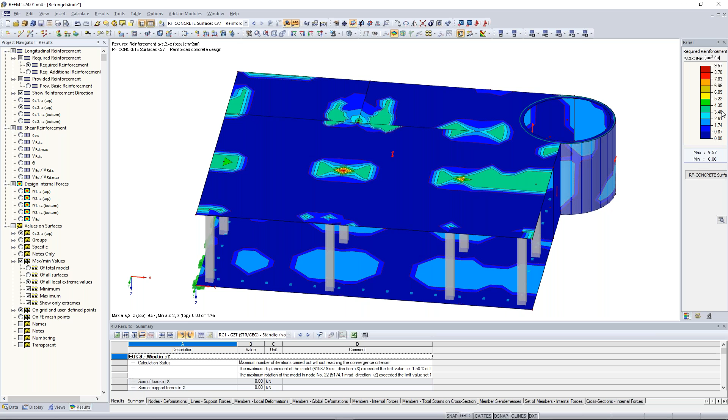When you want to have a better overview, I would recommend you change this panel and say, okay, I want to consider here my rebar, then fill it up, and then you see just the reinforcement you have to put additionally to your base reinforcements. As you can see here, especially near the columns, you have to put some additional reinforcements.

Maybe you have to prove also a punching proof here, and so on. What we can see here also are the shear reinforcements.

When you want to print something to your printout report, just select the right slab, click here on visibility by selected objects. Then I would recommend you deactivate show hidden objects in background, view in Z direction, and give your technical drawer these PDFs or prints here.

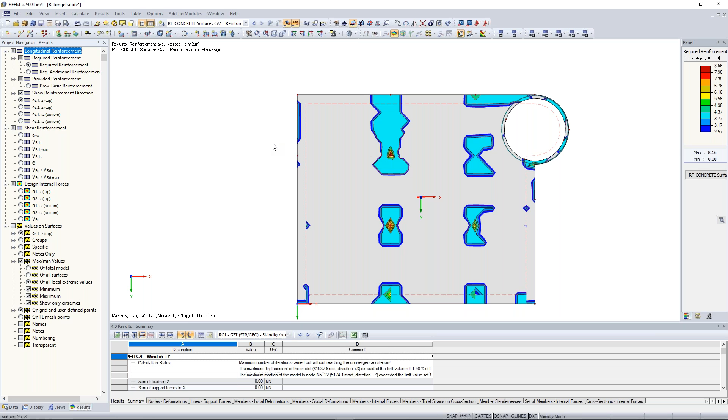So much for the design of concrete surfaces. Now let's jump to the next part, the design of beams.

So for that, I changed the visibility mode. For designing beams, girders, columns, I can use RF Concrete Members. As you know, we modeled in the last online training this downstand beam here. Important - this downstand beam was modeled as a rib, so the member type was rib. When I click here on that member, you see the member type rib.

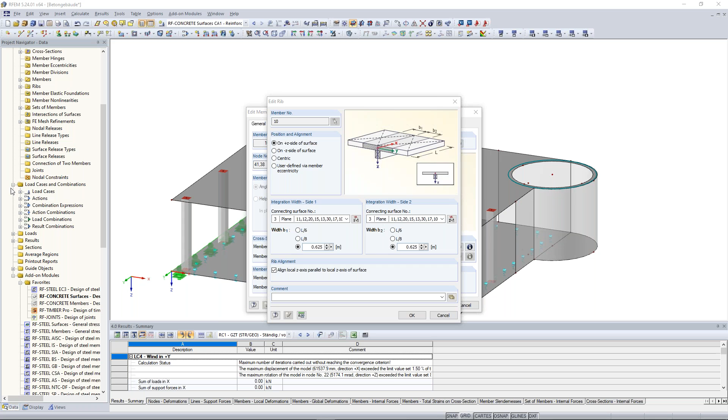An important note here is that a rib considers this integration width, so this rib, this beam, gets additional forces from the surface. This is important to know. Good, let's design this - click here on RF Concrete Members.

And here we have the same structure as in the RF concrete surface module before. We choose here the Eurocode. We are designing for this result combination.

Let's jump to the next part, materials. Yeah, I think that's pretty clear. Cross sections. We can also optimize these cross sections.

Ribs. Here we can see the effective widths, also here in this bitmap. One important note: this rib is part of two members because we design here a set of members. Important when you design a set of members is that you have the same effective widths. Otherwise you will get some problems, and this program will not calculate this.

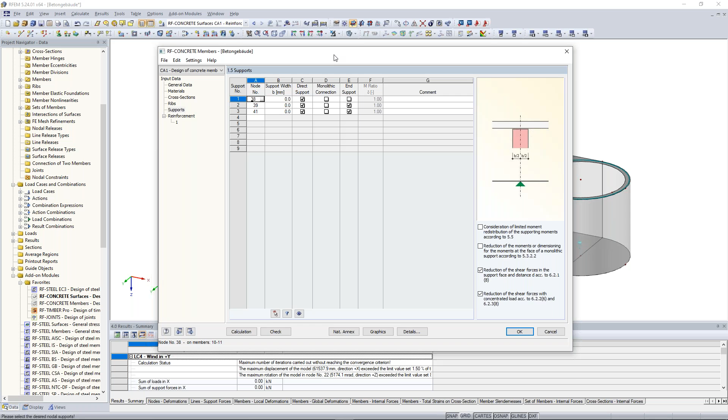Also here we have some supports. This is important, to set the supports correctly. We will do that, so where we have supports here, also on that wall and on that column, click OK. So when I move this window a little bit lower, we can see this support number 38 is this wall support. It isn't an end support, but a direct support, we can do also a monolithic connection. Let's do that, and also for the other ones we do a monolithic connection.

So we have also the possibility to consider limited moment redistribution of the support moment. I think that's known from the concrete lectures of your study, or also of the Eurocode, and also a lot of other options.

Let's jump to the reinforcement part. Here we choose the description and downstand beam, and we choose here the set of member. Okay, it's already chosen, so let's delete here these members.

Which possible diameters do I want to have for my calculation? I choose here 16 millimeters and maybe also 25 millimeters. The maximum number of layers should be 1. The anchorage type should be straight, and curtail type should be none, so we have no curtailment.

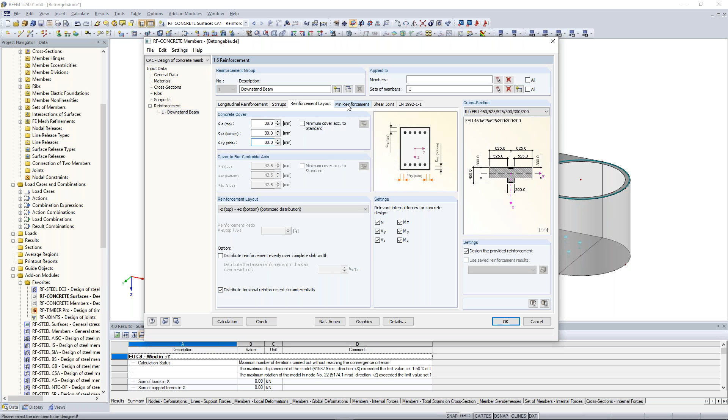Here we can also consider the concrete cover, but for this easy example I leave it here like that, with 3 centimeters. Minimum of reinforcement, I think that's clear. Here you can adjust some additional information also here, and so on.

Good, now let's calculate that. So this calculation will take some time. And as you can see here...

The longitudinal reinforcements are listed on the top and on the bottom. Additionally, the torsional and shear reinforcements are displayed. Here you can see also some additional information about this proof, about this design of this slab.

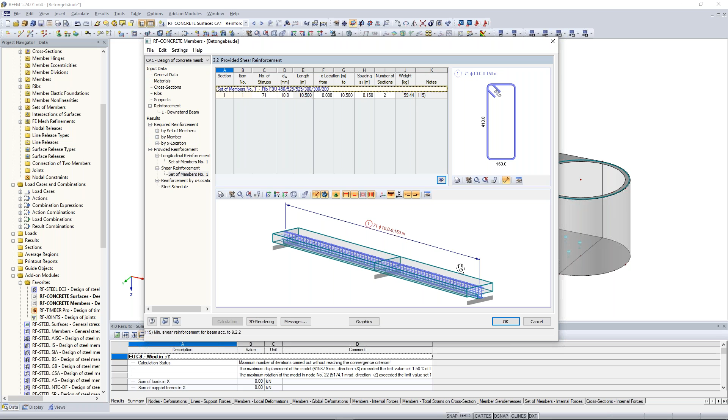Let's look at the provided reinforcement. Here we can see also a nice graphic of this structure, and also here the shear reinforcement. Also here the graphics, you can watch it also with the right effective width.

And this was a short introduction to the design of this downstand beam. Maybe one short note: here you can see the required reinforcement, and here we can activate the provided reinforcement. You see the provided reinforcement is over the required reinforcement, and this is important.

Good, so last but not least, the design of these concrete structures, of these concrete columns. For that, go back to data, click here on RF concrete members.

Important to know is that Eurocode 2, the design of concrete structures, provides 3 methods for the design of columns. We have the simplified method based on nominal curvature, the general method based on nonlinear analysis including second order effects, and also the method based on nominal stiffness. For our example, we create a new case.

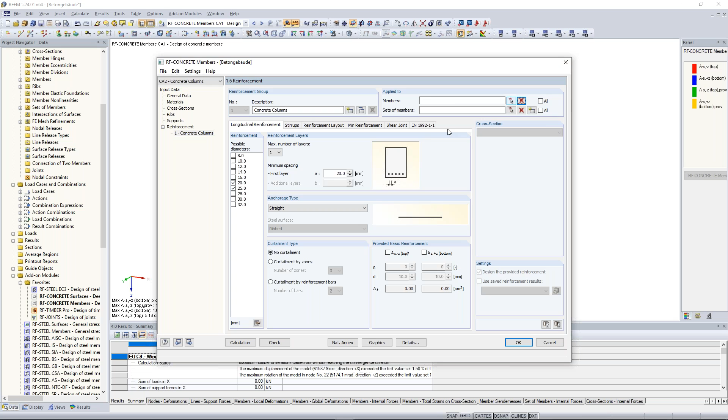Here at the reinforcements, I activate the possible diameters of 20 and 25. Anchorage type should be straight, maximum number of layers 1. I enter here the description of concrete columns and activate just the members which include really the concrete columns.

So again here on view, I watch the concrete columns, cross section, and I choose just these columns, draw a selection window, click OK, and jump to the next register, stirrups.

Also here I define stirrup spacing. The reinforcement layout in that case is in corners, so I want my reinforcements in these corners. And then calculate this.

And here we can see it's not possible to design result combinations for nonlinear calculation. So I have to remove it and do it for the normal load combinations.

So this will take some time, and after that we can watch the results. I think I calculated too much load combinations, but we will have it in a few minutes.

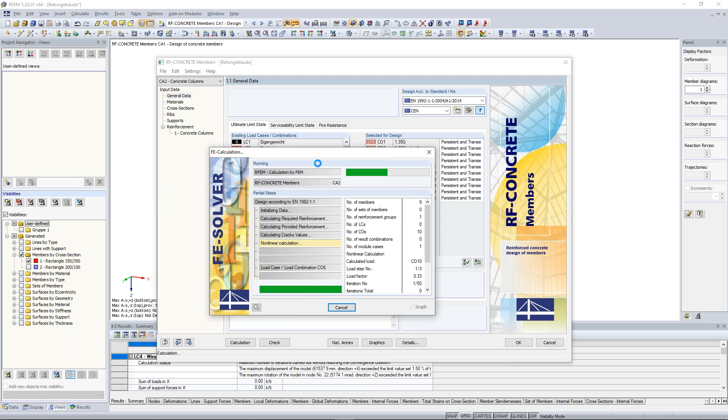Sorry for that, I have calculated too many load combinations. Normally, the load combination with the most pressure loads is the load case which will be most important to design. But now we have combination 9, so the last one will be combination 10, and after that we can watch the results.

Short hint: the nonlinear calculation will take a longer time than the normal calculation. But now I'm pretty sure we have it. If not, I'll cancel this and calculate it only for one load combination.

I cancel this because it takes too much time. But it has already calculated for some points.

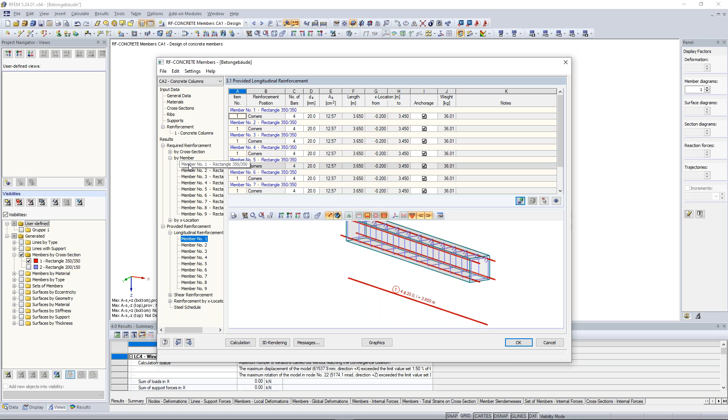And here we can also watch the reinforcements by graphic, and what we have here as provided reinforcement and as required. The required is just the minimum reinforcement. Let's look at it here.

So we cancel the visibility mode. We see here the different reinforcements.

Good, so this was the last part of this training. I hope you enjoyed it and learned something. We gave you the basic knowledge of the design of easy structures in every engineering area, so we had timber structures, steel structures, and concrete structures. Now I think as students you are well prepared for further steps with RFEM, especially when you do designs and so on.